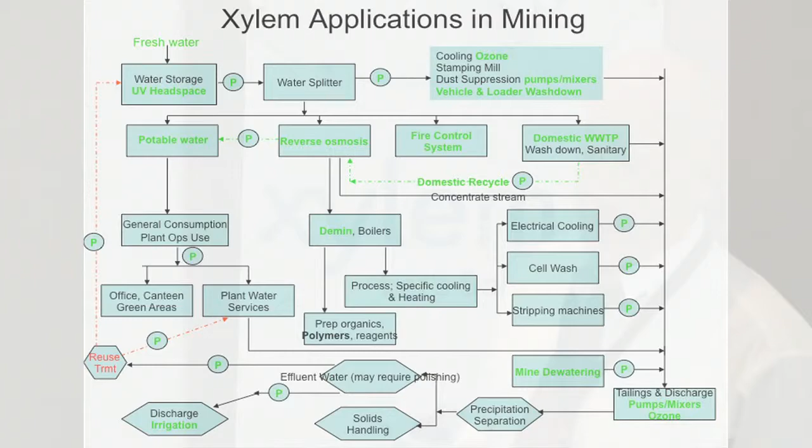A lot of people don't like to address this, so we're going to talk about this in a little bit. There are 4 basic phases of mining operations, and every one of these operations has a different need.

Exploration, of course, is your first one, and you need some kind of temporary services and supply, and you need to be able to discharge and treat excess drilling water, and you need to be careful of your impact on the environment, but you're small scale here.

You know, exploration, what do you got? Half a dozen guys, maybe a 10-man crew at best. Now, back in the day, we took exploration crews out.

We didn't worry about wastewater treatment. We just dug a hole. And they don't let you do that anymore. And they got to have something.

If you're tying your exploration in with development, you're going to be there for a while. So you need some kind of portable facility for wastewater. 9 times out of 10, you've got to have some type of facility, trailer mounted, for your processed water and your domestic camp water. And it's got to be able to deal with a wide variety of inflows.

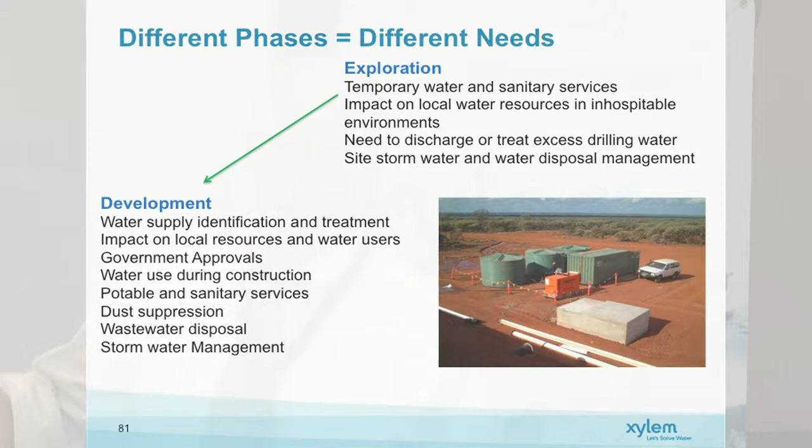Now, dust suppression—you say, well, where do you get involved in treatment and dust suppression? Mostly that's polymer based. And I saw some really good discussions recently on dust suppression and how you apply the water on the road, and I learned all kinds of things I didn't know. But we also found out that to provide that adequate crusting on the roadways that you want during dust suppression and your polymer feed, you need a water supply that's fairly free of microbial activity.

Okay, application of ozone. We're seeing mining operations now where you cannot take a vehicle off the site without washing it down. Again, use ozone for wash down.

And of course, when you move into production and shipping, that's when your systems are really cranked up, and that's where you need larger wastewater systems. So you take your modular systems that you had for your development phase, and you just add modules. The key here is, can you depend on the local company to service all this if you don't want to do it?

If you want your people oriented toward production, can you depend on local companies to do it? That's key - if you're running a small ozone system on site for arsenic or cyanide reduction, where you need about 3 kg of ozone per kilogram of arsenic to reduce it, can you have somebody run your service checks and maintenance on your ozone system? The answer is yes.

Xylem already does that with dewatering systems and pumping systems. In fact, most underground operations in Peru today have Xylem guys living in the camp on 2 and 3 year contracts doing nothing but maintaining transport systems.

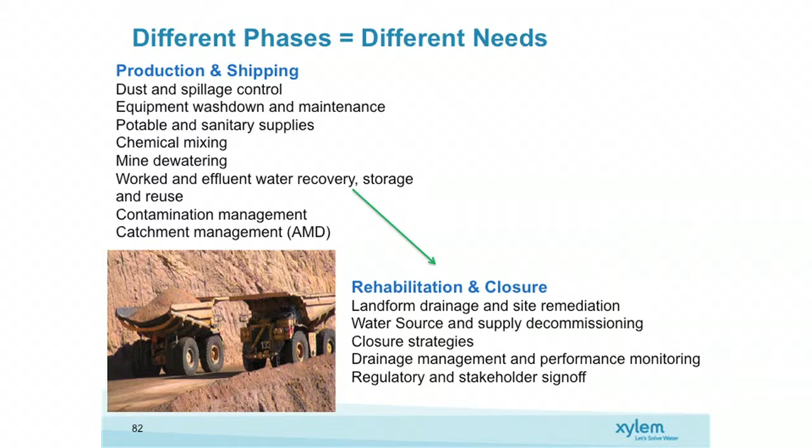Now here's the question I got asked about today: rehabilitation and closure. When I was a kid growing up in a coal patch, we had two creeks running through the bottomland, generated by mine drainage from two different operations. We called one Yellow Creek and one Red Creek - we didn't know any better. So what do you do with remediation? What do you do with closure? Is that a big issue here? Are people talking about that all the time?

It's kind of an issue for us too. We can't always handle it - we'll tell you right away if we can or not. But it depends on what the mine's closure strategy is.

There's a couple of ways of doing this. One is doing a very close check of all sources of the supply, instead of just point source like we were talking about for wastewater. We're starting to dig deeper into how you determine where your problem's coming from. We don't do that, but there are companies out there that do, and often your natural resources commission, if heavily involved in mining, can perform some of those functions for you.

You basically back up through your watershed. You walk the stream, find out where your pollutant sources are, and shut them down from there, rather than treating it all as one major stream. There are a number of ways to do that - you can close off the source. If you're running tunnels or shafts, invariably you solve the problem at that point, but it'll back up somewhere else - show up on the other side of the ridge, or in some other watershed area. So you've got to be careful about that.

So we've got container-mounted rigs, desal rigs. I got a question about different types of wastewater treatment for campsites. Well, there are several. What you're seeing here is known as the submerged aerated filter system.

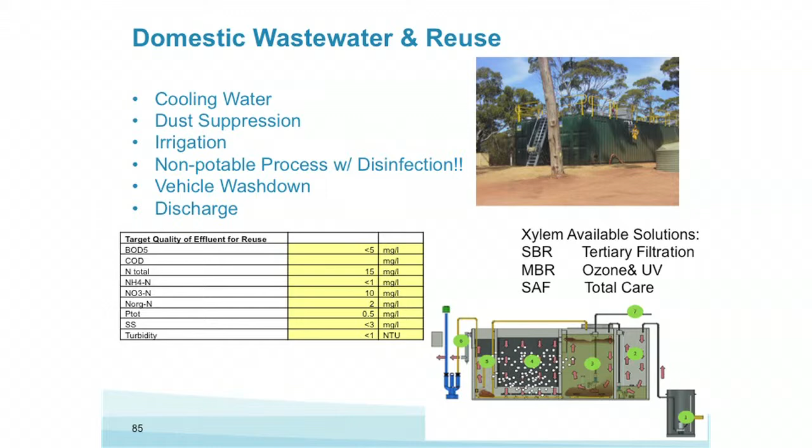Generally speaking, when we're talking mine supplies, we're talking either submerged aeration filters or MBR processes. Occasionally you're looking at SBR, sequencing batch reactors - occasionally, because they're pretty good size and expensive to do. They don't have a very compact footprint. That, for instance, is an SBR system in that picture.

But most importantly, what you're looking for is the quality of water required from these domestic wastewater systems. These domestic wastewater systems get used for mining, food and beverage, biological plants, pulp and paper.

You know, any place where you see that kind of biological processing taking place, you can use these small plants. Okay, so if this is the water quality that you're looking for,

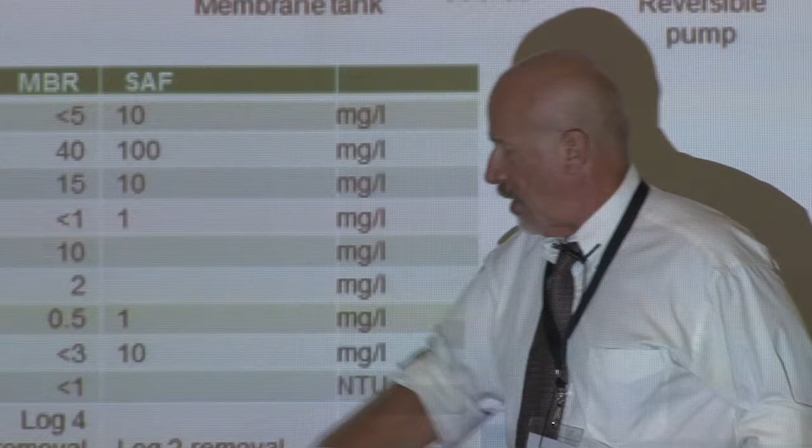we can use this type of supply. If the type of water quality you're looking for is much more than that, this is MBR, that's what we're looking for. If you're trying to get down to log 4 removals of biological contaminants, coliforms, crypto, when you start looking at this water quality, what you're saying is, I want to bring this water back and reuse it, and I don't care if I have human contact with it. This is near potable supply.

If you just want to discharge for irrigation or you just want to discharge for receiving stream, you can go this route. Is this more expensive than that? Yeah. Not orders of magnitude more expensive, but yeah, you're going to pay a little more for it. And this is an MBR type system, this MBR option. As you can see, it's got a very small footprint.

So, if I'm doing domestic recovery of water from a campsite or a mining operation, I need to make that decision about what I want to do with the effluent water. And again, we can help you with that.

Cyanide destruct, kind of touched on it, but that's what that system looks like. Very much similar to what Brendan was talking about. In fact, he gets awful shy and shuffles his feet about it, but he's probably one of the best experts in the company with this type of application of mining, and he's right here in South Africa.

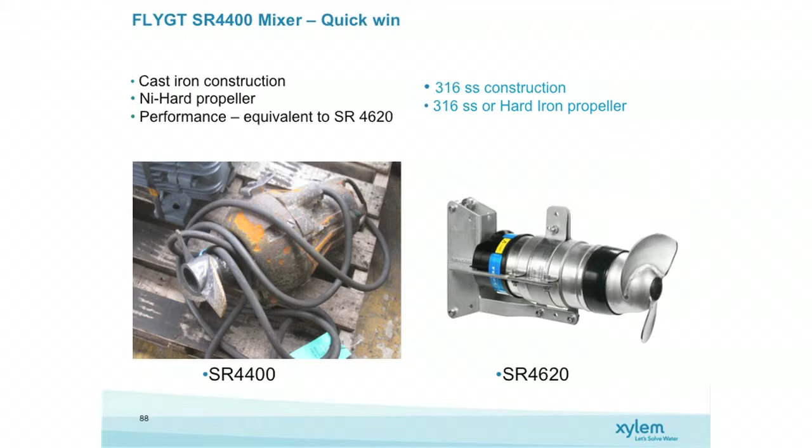Well, if you're running coal mining operation, for instance, where you got classifiers, high water usage, you got to keep the sumps moving without a lot of buildup. We do that. Mixer and pump operations.

If you need something that floats out over your tailing pond, keep sludge in movement so you can dredge that pond without having to go and dredge it physically on a regular basis, we can do that. So anything that has to do with transporting the mining operation itself, including mixing and slurry movement, we can help you with that.

There's a lot of opportunity there. A lot of cost savings for your operation as far as shutdown and maintenance time is concerned.

Effluent reuse requirements, I'm just going to kind of add this on. Then we can always go back and talk about biological if you want. This is what's going on in the industry today. Control metals and salts in the effluent.

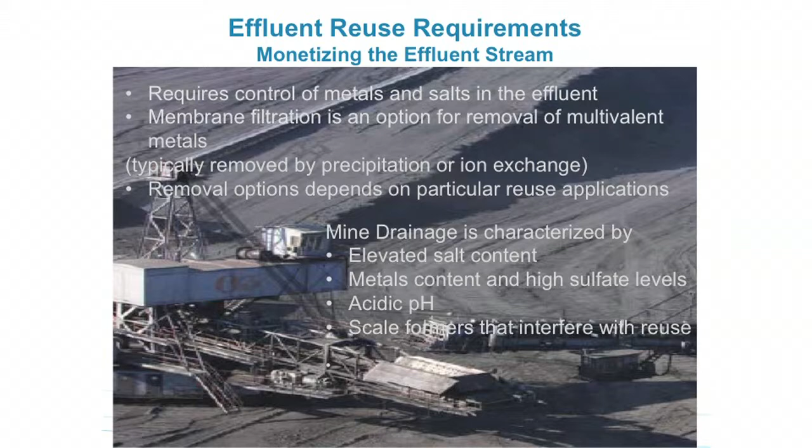Is the membrane a filtration option for removal of multivalent? Yeah, it is. You can remove metals with it. Typically removed by precipitation ion exchange. Ozone plus membranes is an option. Membranes themselves, depending on what the ion is, an option.

Because remember, when we talk about membranes, that's a physical process. That's all it is. So if you got a molecule that's bigger than the pore size of the membrane, and you're not going to scale the membrane with it, you can remove it. Get it out of the system.

Removal options depend on particular reuse applications. That's all we've been talking about. Okay, so what are we really talking about when we get talking about mine drainage? We've got elevated salt contents.

That's one of the reasons you can use membranes. But remember, you've got a high capitalization with moving membranes. What's the downside to using membranes for salt removal? It's that you create a hypersaline stream that now you've got to do something with.

Okay, so keep that one in mind. You solve a problem, but you create a problem. And about the only real good means for dealing with that is through some kind of thermal process. Dry it out. Then you have to get rid of it.

Usually you have high metals content and high sulfate levels. Usually pH is pretty acidic. That's why the high density sludge process is so popular, because you can remove a lot of contaminants in an AMD, an acid mine drainage stream, and still return that water for process use without doing anything else with it. It's a process where you don't have to reduce your salt levels, you don't have to reduce your salinity very much. Oh yeah, and scale formers that interfere with reuse.

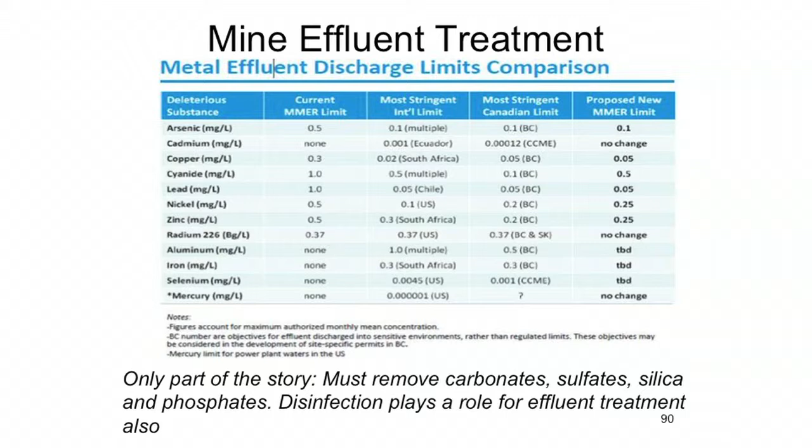For the most part, there are a couple South African numbers here. Copper, zinc, these are the most stringent international requirements. Iron. What was arsenic here? What was our arsenic number? I'm sorry, cyanide, yeah, cyanide was 0.5.

But, like it says down here, that's only part of the story. If you want to reuse the water, sell the water, or oftentimes just discharge the water, depending on sensitivity of the receiving stream, you've got to take out carbonate, sulfates, silicas, phosphates, and then you also have discharge limits. So, the point of all this discussion is, every one of these streams is unique.

Can we talk to you about them? Yes, we can. Can we deal with every one of them? No, we can't. We've got some pretty specific areas, but we will discuss any stream that you want to talk about. If we can't solve it, and we know somebody that can, we'll refer you. Happy to do that.

Questions, comments? Was there any insight here? Is this stuff you already knew? Anything new?

Yeah, I think we've got a good opportunity to combine processes and get a solution. Yeah, I guess in the end, all of this is really the message we want to get across.

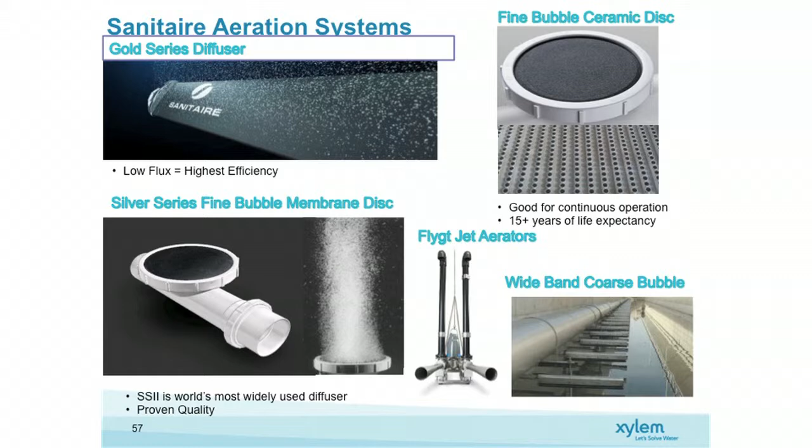Now see, this is an opportunity here. If you've got a channel anywhere where you're moving liquids and you've got a problem with buildup in there, and you can't think of any good way to roll this channel, coarse aerators will do it for you. We can do that, no problem.

But what we really prefer to do is get involved in the engineering of the design to optimize your cost, okay? This is all about energy savings. If you don't lay these arrays out right, you're going to spend more money on your life cycle than you need to, okay? So we designed for that.

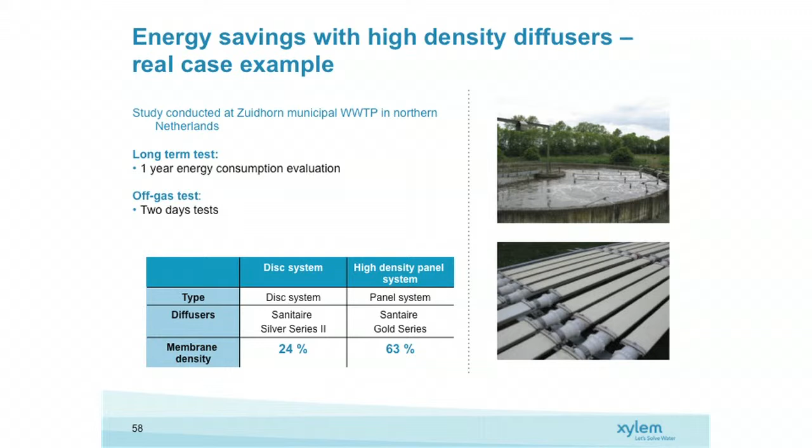Talking about density, energy savings, high density diffusers—that's what these are, they're high density diffusers. So when we do a disc system, we're looking at about 24% of floor coverage. When we do the high density panels, we're looking at about 63% coverage. What we've got to look at is trade-off cost, capitalization plus life cycle. Some applications it just doesn't work real well, some it does, we can advise you on it.

Here's your off-gas testing, here's your energy savings over fine bubbles. Okay, fine bubbles we use quite a bit. Now here's an example of a secondary system that does not require anaerobic digestion.

This is biology in a box. You take out all the pumping and the capitalization. You do all your aeration and clarification in a single tank. You can get an anaerobic operation, an anoxic zone, an aerobic zone, and you can do nitrification, denitrification if you want. And you can adjust the storm cycle loadings automatically.

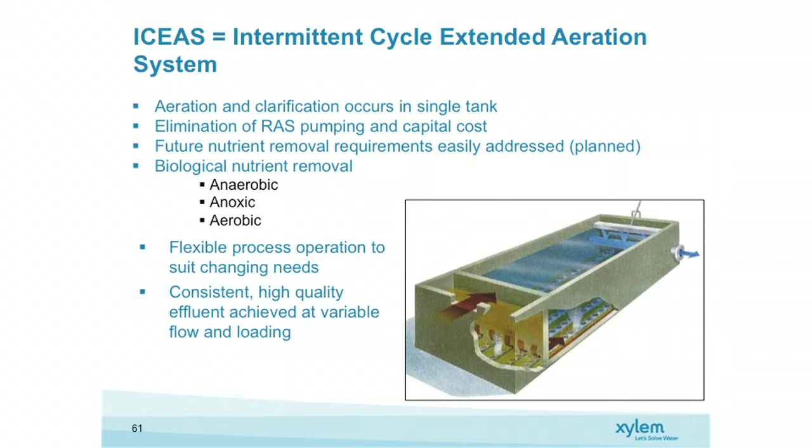Now, I've built a few of these actually. Pretty bulletproof, I kind of like them. I've used these, and again, I talk about South America a lot. South America is where I did most of my wastewater work. Africa and Asia is where I did most of my filtration clarification work over the years.

Very simple. You got a pre-react zone. So what this is, is a continuous SBR. Fancy name is intermittent continuous, or intermittent cycle extended aeration. Just means it runs all the time. You don't have to batch. You can do one tank instead of two if you want.

You got a pre-reaction zone here, which treats the sludge coming in. You do your aeration here, your sludge draw-off back here, and you decant your water off the top. Now, you recall when we were talking about water quality, this gives you a very high water quality in an effluent. Generally speaking, we talk about less than 15 milligrams per liter BOD, less than 15 milligrams per liter TSS coming off of this.

You can reduce your nitrogen down to 1. It's a pretty efficient system. Works in reaction, settles out, decants. You still got water coming in the whole time. You waste out your sludge off the bottom.

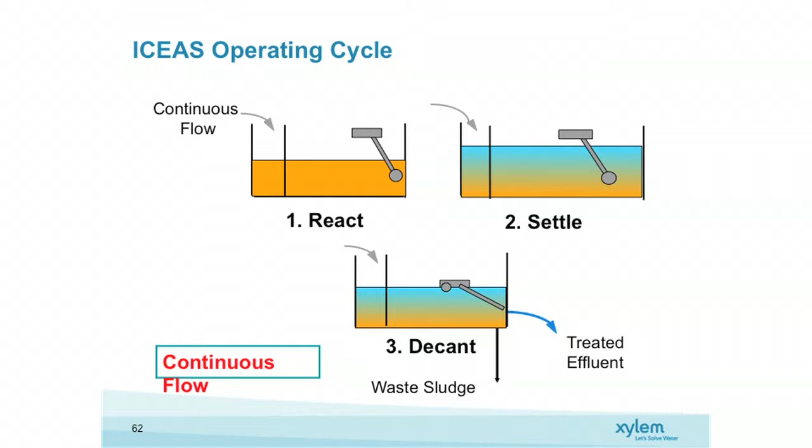These are built around time. Now we talked about ease of operation - what's easier to operate than a system that runs on a clock? Once these are set up, they're just time-based. You don't have to pay a lot of attention to them. What do you have to watch out for? Generation of filamentous sludge in the front end if you're not screening very well.

As was pointed out to me this morning, because I was talking about process, I inadvertently forgot to talk about screens - got called up real short on that. But yeah, obviously you need screening, but you don't need anaerobic digestion here on the sludge if you don't want to.

There we go, continuous flows. What's the maximum BOD coming in that tank can carry? They don't like to tell you this, but you can handle up to about 1,000, depending on what kind of reduction you want. You're looking for like a 98% reduction? Yeah, it'll handle it. It'll give you that extended cycle to do it.

Like I said, it's very simple. Now, when you go to do denitrification, of course, since you've got an anoxic operation in the process, you put a mixer in. So everything in this tank, including the control system, we can provide. More importantly, we provide it and guarantee the process system.

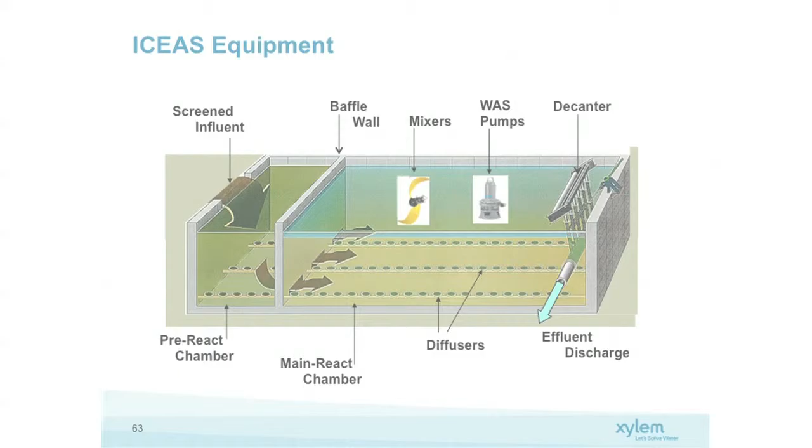Now, that's one thing you always want to do - I don't care what your vendor is. When I was running projects, I always looked for vendors and suppliers that would give me a partial process guarantee. I wanted to make sure that each piece of my line, when I was putting a deal together for a client, had a guarantee on it. Not only a guarantee on the process, but a guarantee on my critical path and my delivery and execution schedule.

We'll try to work in the system. If I can't do it, I'll tell you right away. Within 7 days after you present me with a problem, I'll tell you whether we can do it or not, and we'll put it together. But we will talk to you during the process. I want to sit down across the desk from you and talk about it. I have literally walked out of meetings where a potential client stands there and says, well, I don't want to really tell you, but it's roughly this, but I don't want to tell you what I'm going to use it for, and I don't want to tell you what my real effluent quality is. You give me some alternatives and I'll take a look at picking one. I don't feel the love in a situation like that. I'm one of those guys like a partner, okay?

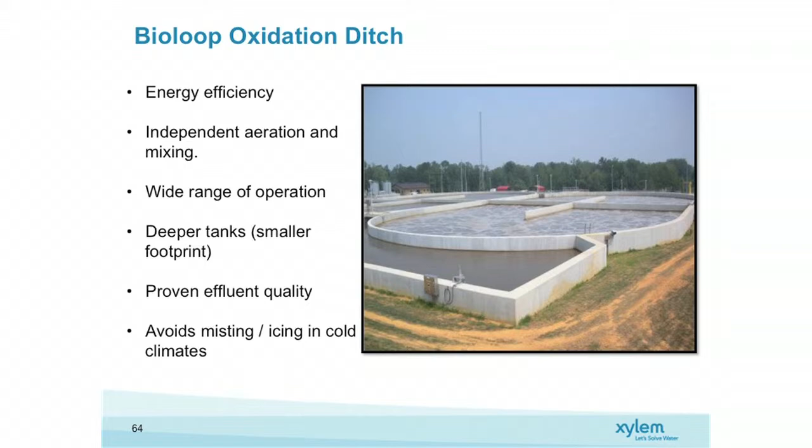So, but anyway, that's that opportunity. Another thing is Bioloop oxidation ditch. Like I said, I don't see a lot of these down here. You were saying that they're... oh, they are? Okay. We can do retrofit on existing loops. We can also take loops and put membranes in. Want to do that? That's kind of cute. That works pretty well, works better in rectangular tanks. But we can take existing civil works and go from standard conventional processes to membrane processes within the civil works. That's a big cost saving. But yeah, we can do loops.

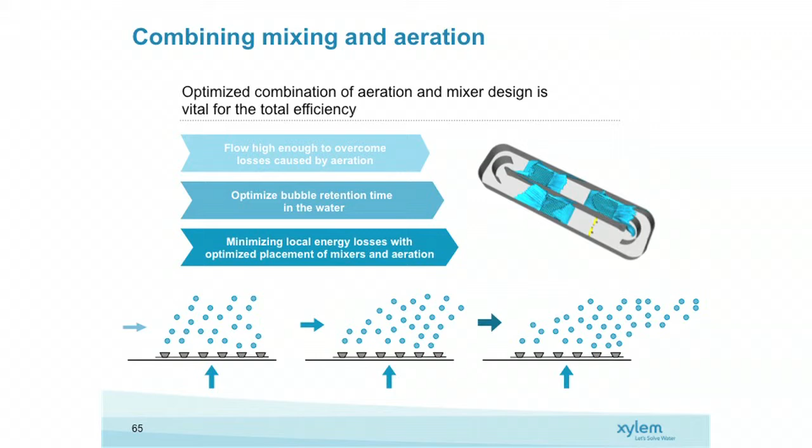And we can combine mixing and aeration. There's obviously advantages to having mixing and aeration taking place in the loop. You minimize your energy loss by placement, and we run CFD on these, so we can work with you on the design. There's a shot of the mixer with the aeration, so you can clearly see your anoxic and aerobic zones.

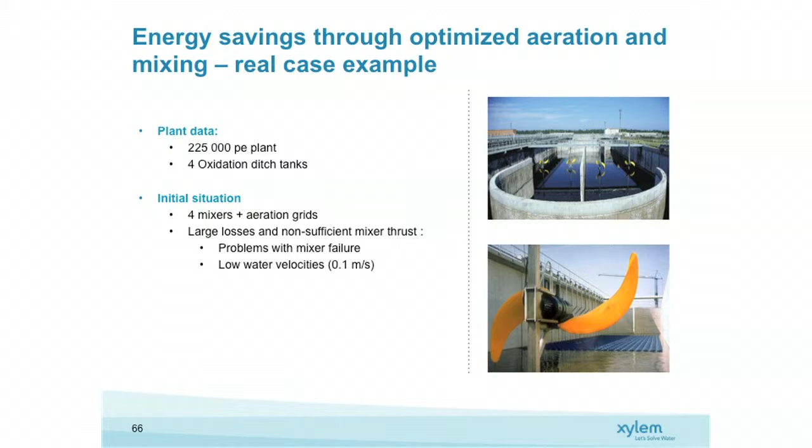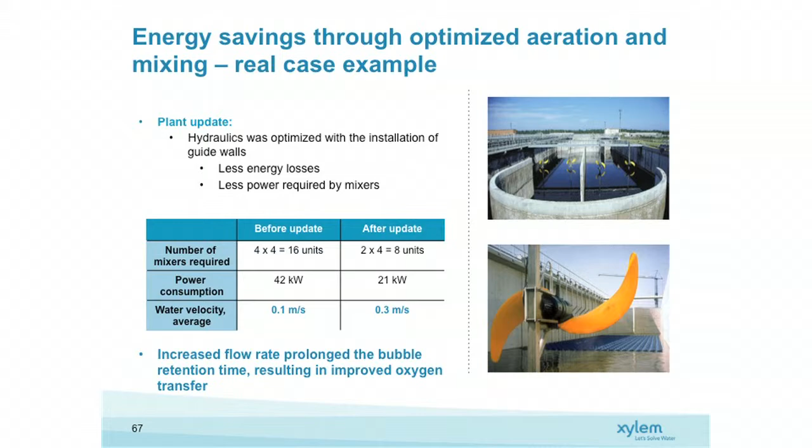Okay, this is a case study. This was the original plant data, the initial situation four mixers plus aeration. They had a lot of thrust losses. This is the update: power consumption dropped from 42 kilowatts to 21, with an increase in water velocity. Bubble retention time picked up, and of course if you've got retention time, you've got improved oxygen transfer. And again, let's bear in mind, this is not exotic technology here. This is nice, clean hydraulic stuff. You sit down, you figure it out, experience tells you where to put the mixers versus the aeration. Figure out what your energy recovery needs to be, what your consumption savings need to be, and you can work it out.

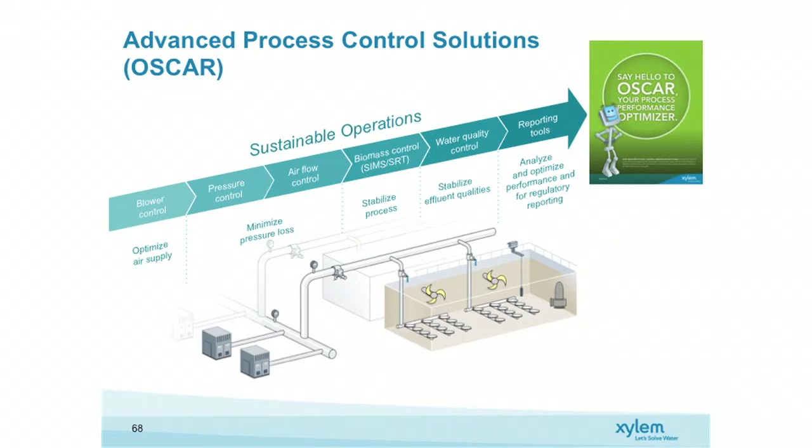Not hard, okay? Just need the background, just need experience. The advanced process control solution - this is basically the operating and monitoring, data logging process. Basically what we're saying here is yes, we can supply you with a control system, with data logging and report generation, a couple of screens. It supports the operator, mentors the operator - that's the whole purpose behind this. And you put out your monthly report.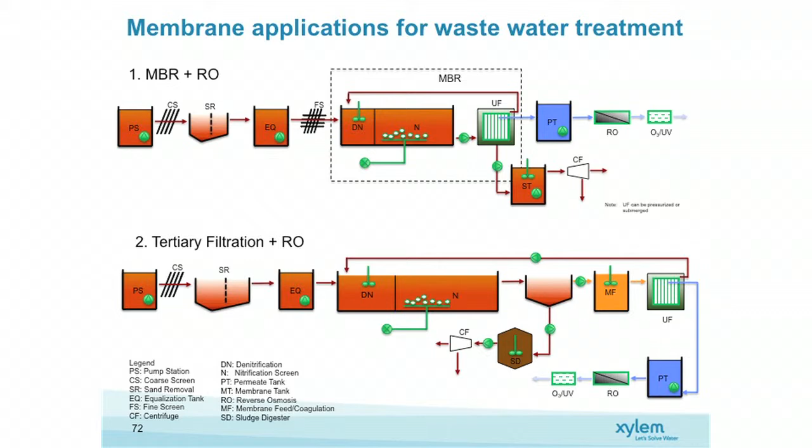This is tertiary with RO. This is straight MBR with RO. How complex do you want to get? What's your application?

Those are two basic designs. What's your change from your conventional activated sludge? We had a big conversation about activated sludge off to the side here earlier. You take out the primary clarifier - all right, let me back up there a second. Here's your standard activated sludge system. The only thing it's not showing here is your sludge return.

This is without talking about taking out the anaerobic digester. Okay, primary clarifier, denitrification, nitrification, secondary treatment, secondary clarifier, sludge return back to primary. Okay.

First thing you do is take the primary clarifier out of the solution. That becomes your biology - denitrification, nitrification - much smaller footprint.

Take the secondary clarifier out, replace it with a membrane filter. Now you've got secondary and tertiary treatment. Remember, because it's multiple barrier, you get your biology taking place here, and your physical reduction taking place here, the membrane.

Increased MLSS concentrations, and you just close it up. That's what I'm saying - you can put membrane solutions in any civil structure that you've got to build.

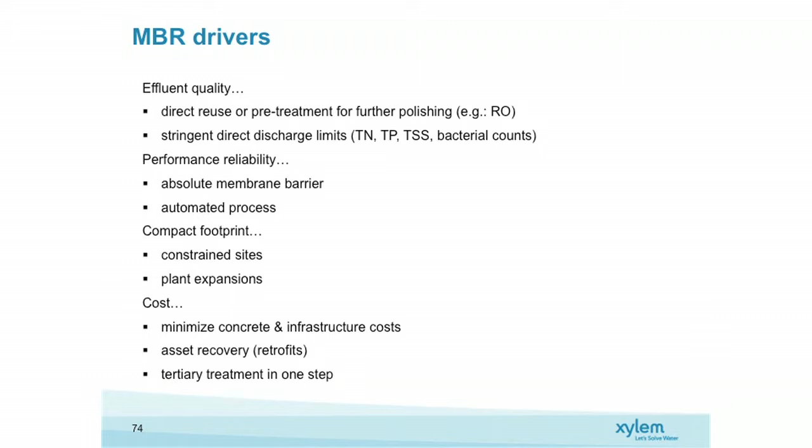Why? Direct reuse, okay, pre-treatment - takes care of all your stringent discharge limitations if you've got them. Absolute membrane barrier, so no matter what the loading is, now you might have to backwash more frequently on your membranes, but regardless of changes in your influent quality, you will always get the same effluent quality because you've got a mechanical barrier.

All right, but like I said, it gets a little more costly - you've got to clean that thing quite a bit more often. But it's an automated process, it'll take care of itself. Compact footprint, and you minimize costs, and you work out what your asset recovery is on retrofit. Okay, great for expansion.